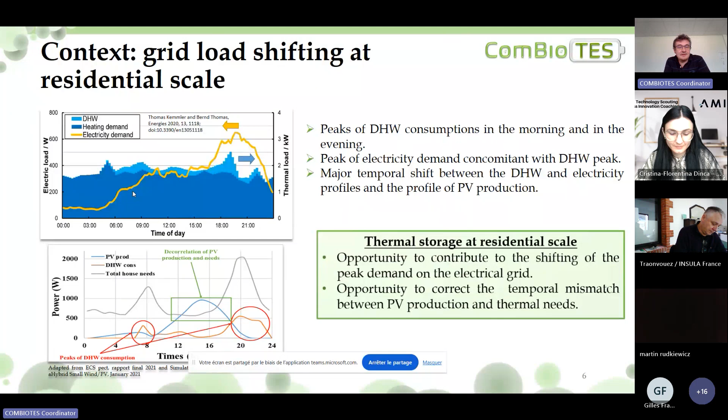at residential scale. So in ComBioTES, what we want to do is to develop thermal energy storage solutions for thermal applications in houses, typically for space heating and/or hot tap water production and/or cooling at residential scale. What you can see here is the real scope of the project. The main scope will be the development, test, characterization and demonstration of two different thermal storages. The first one, called the versatile, mainly for heating and free cooling, and the second one, which is the topic of this workshop, for the production of domestic hot water and space heating.

In parallel, in the project, we have an important task devoted to what is called EMS, Energy Management System. The EMS is supposed to make the link between the grid, the PV on the roof, the cost of the electricity, basically everything, and the thermal storage and the thermal needs. The objective is to operate the thermal storages efficiently.

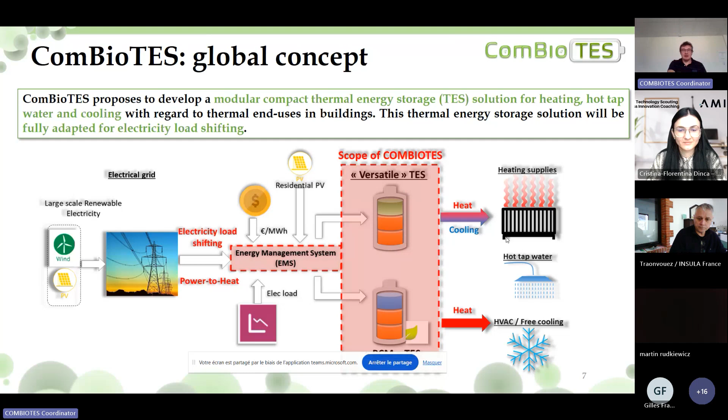The behavior will be a little bit different in summer. With low price of electricity, we will make what we call a cold charge of the versatile TES that will be used later for cooling, and we will charge the PCM TES for domestic water. And when the electricity prices are high, or when we have a demand, we will discharge the versatile for space cooling, and we will discharge the PCM storage for hot water. This is the principle.

Some objectives of the project will be quite short on this slide. We have a lot of objectives, and the main objective basically is to design, characterize, test both thermal storages, the versatile one and the PCM storage. We have to work on a new bio-based PCM for heating and tap water. We have to develop the EMS, the Energy Management System. We will perform some kind of techno-economic analysis and environmental impact also. And something which is a very important part of the project is the demonstration.

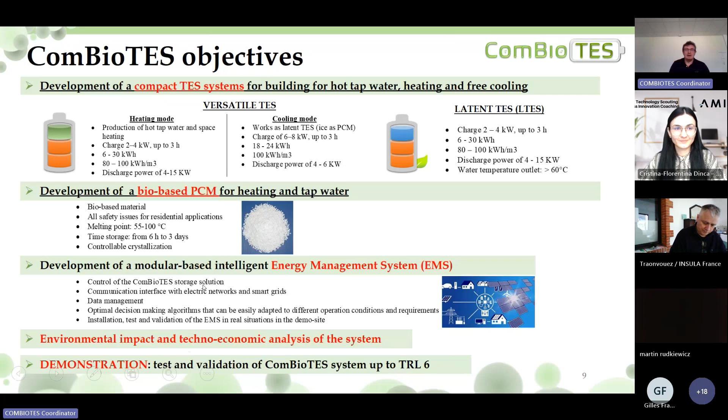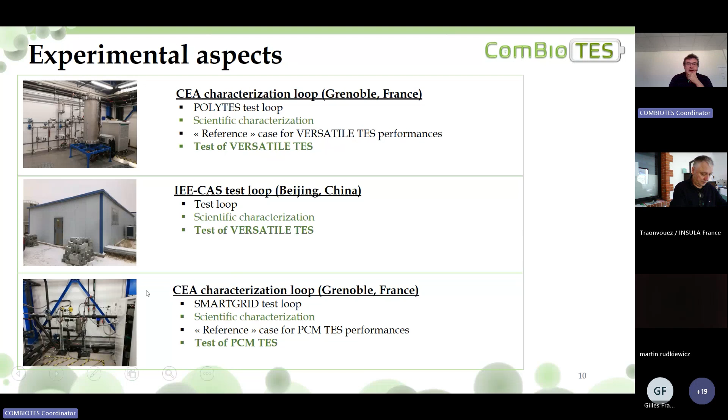The demonstration will be made in a lot of different sites. The first one, the main one, will be the CEA in Grenoble in France, because CEA is responsible for the development of both storages. So we will test the versatile and the PCM storage from a scientific point of view. Then we have a demonstration site in China to test the versatile TES. This is a scientific characterization, academic tests. And then we have three more realistic demo sites.

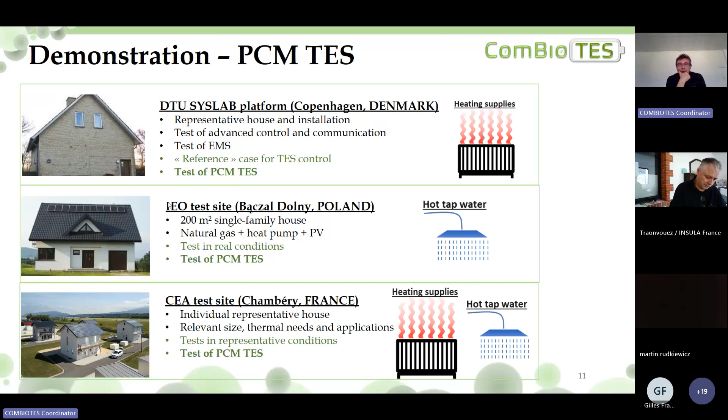The first one is at DTU in Denmark. We will test the PCM storage for space heating, in not a real house, but a close to real house, a representative house with a lot of different installations. At CEA in Chambéry, in France, we have the same kind of installation. We will test the PCM storage for space heating and hot tap water. And we have a site in Poland, which is a real house with real people inside, a four-people family, and we will test the PCM storage in real conditions to produce hot tap water.

Today the workshop will be divided in four different sessions. The first one will be focused on the input: what are the specifications, the requirements, the constraints for the sizing and the definition of the storage. In session 2, we will focus mainly on the protocol, the way the storage has been defined and the way we transform a storage into a complete prototype. In session 3, we will focus on the EMS, the energy management system, the architecture, the philosophy, the different developments, the use cases, and we will close the workshop with session 4 and the demonstration, the demo sites, the way the prototype will be integrated, and the use cases.

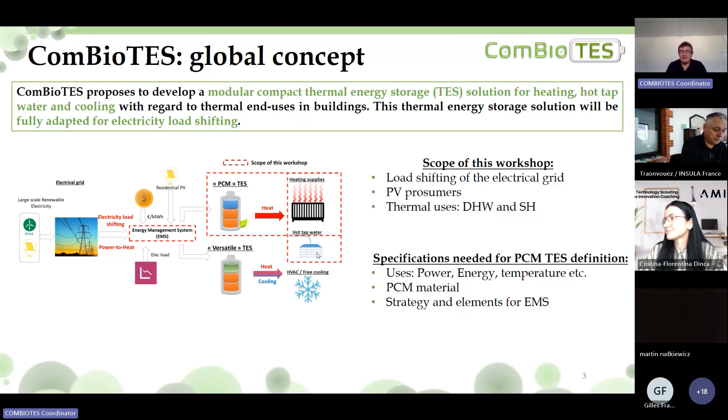So what we will do is to see some specification for the thermal storage according to the electricity market and according to economical aspects. At the same time, on the other end of the spectrum, we will see some specification according to the thermal uses. Thermal uses, so this is the domestic hot water and space heating application.

We will briefly look at some recommendation and specification regarding the PCM. PCM is for phase change material, so that means some specification for the material used in the thermal storage. And we will also look for some specification for the development of the EMS.

The first element is the electricity market, since we try to participate to the grid load shifting. So we look at different regulation in Europe of the electricity market. It's not so easy. It's a little bit blurred. There's a lot of different regulation. And the main conclusion is that this is not easy because there's not a single and easy configuration. And basically, each country is a specific case.

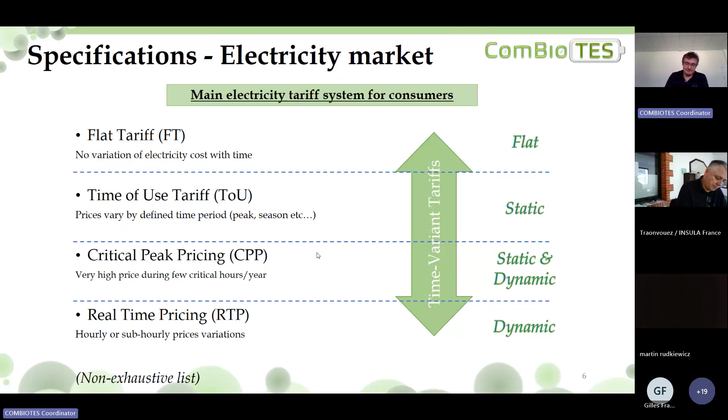The first thing that has been made in the project is to evaluate the relevancy of the power-to-heat for thermal energy storage business, depending on the price tariff. So we choose different countries. We have 1, 2, 3, 4, 5, 6, 7 use cases, mainly in Europe, but including China also. And we try to evaluate the cost efficiency of thermal energy storage.

For flat tariff, the main conclusion is that there's no interest because there's no difference in the prices between night and day, for example. And basically, when the prices of electricity are evolving with time, it is more and more interesting to use thermal storage to perform power-to-heat. And obviously, the most interesting situation will be a real dynamic tariff of electricity.

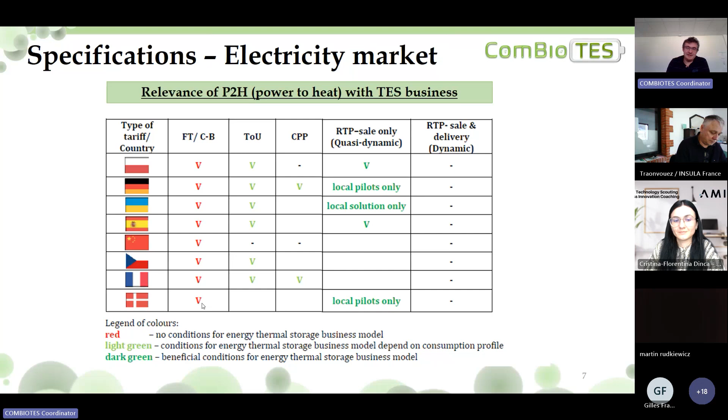So just from the electricity market point of view, what I'm saying is that we need evolving prices of electricity, even if maybe it's not the best solution for the simple consumer. And some of the different cases that we show in the previous slides will be integrated and considered for the EMS and for the evaluation of the relevancy from an economic point of view of the thermal energy storage.

If we look at the other end of the spectrum, so the thermal uses, we look first at the domestic hot water regulation. It's not so easy also because it's different in every country. It's not really regulation. It's more a kind of list of strong recommendations. But it can be more or less summarized as it is.

So you have a minimum temperature in the water tank, because all these regulations are made for the water tank, which is the thermal storage deployed in houses. You have basically a minimum and maximum temperature in the water tank. You have also a minimum and maximum temperature in the draw-off.

Based on this small review, it was possible to define some elements for ComBioTES. And basically, we consider that we want a temperature higher than 60 degrees in ComBioTES, and we will consider that the discharge will be stopped at 40 Celsius degrees.

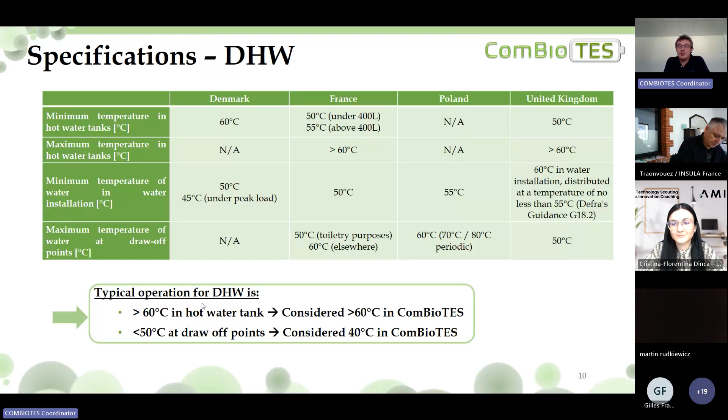Regarding the typical value of consumption, the typical value for the sizing of the storage is that for a house of 4 people, we need something like 8-9 kilowatt hour of thermal storage for the production of domestic hot water.

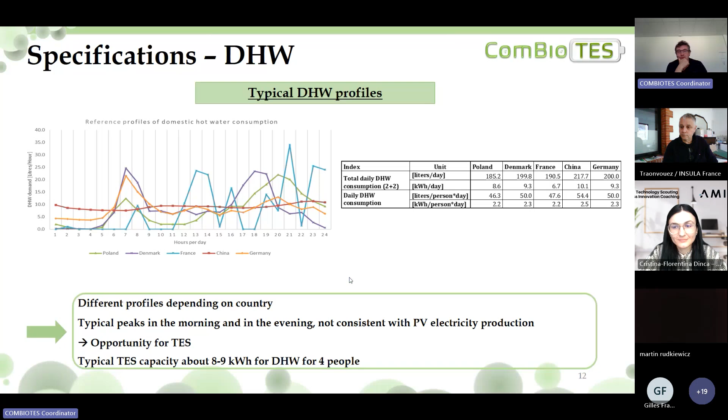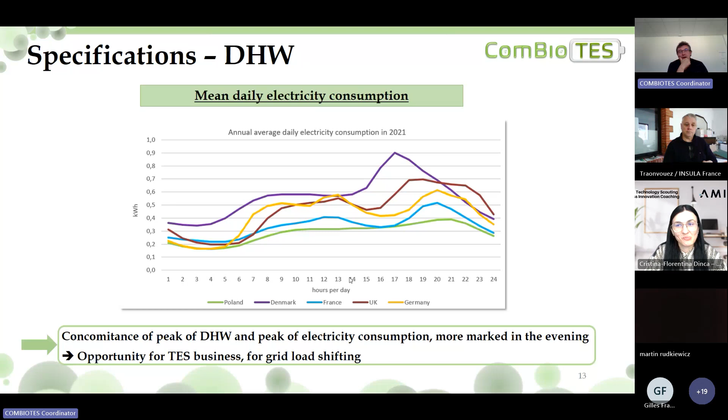Just something to remind is that what you can see here is the typical electricity consumption of the same house in the same country, and you can see that there's a kind of concomitance of the peak of domestic hot water and the peak of electricity consumption. And this is even more true in the evening. So from an economic point of view, there's an opportunity for the business of thermal energy storage for the participation in grid load shifting and to try to make more money by not using electricity for the peak in the evening.

And in this case also, due to the concomitance of the peak of space heating and the peak of electricity consumption, for example in Denmark, we can conclude that there's a kind of opportunity for TES to participate in grid load shifting linked with space heating.

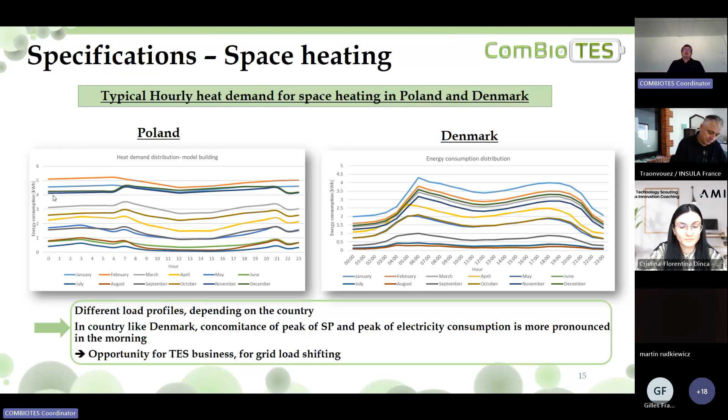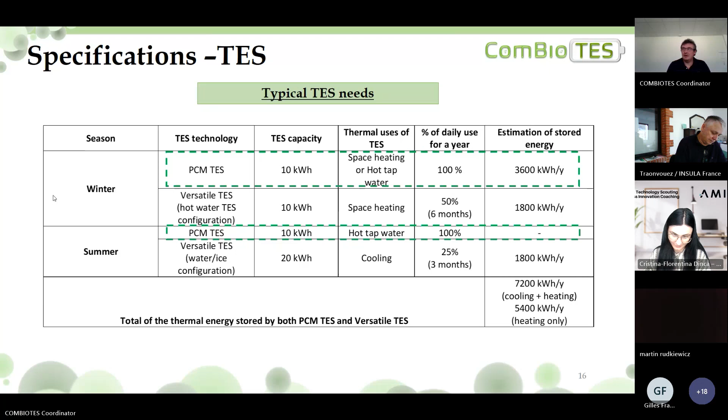If we try to summarize the needs, we can conclude that for the PCM storage, something like 10 kilowatt hour for hot tap water and sometimes also for space heating can be sufficient to fulfill 100% of the daily use of the house. And so, based on these elements, we define the first use cases.

So for domestic hot water, we want PCM with temperature higher than 55, 60 Celsius degrees. We want a storage with a capacity in discharge of about 8-9 kilowatt hour at outlet temperature higher than 40 Celsius degrees. The thermal power in discharge will be a little bit higher than 20 kilowatt. This is taken from ADEME in France, which is the French Institute for Energy Use. And the typical discharge flow rate will be 12 liters per minute, from ADEME also.

For space heating application, due to the large diversity of configurations, we choose to use the typical specification and typical configuration from the DTU partner in Denmark, because it seems to us quite relevant. So the inlet temperature in the space heating system will be 55 Celsius degrees, the return temperature will be 45 Celsius degrees, and the nominal flow rate is 13 liters per minute.

Just keep in mind that a storage sized for domestic application will clearly be too small for complete space heating application, but it is not a problem. It is quite accepted in the project.

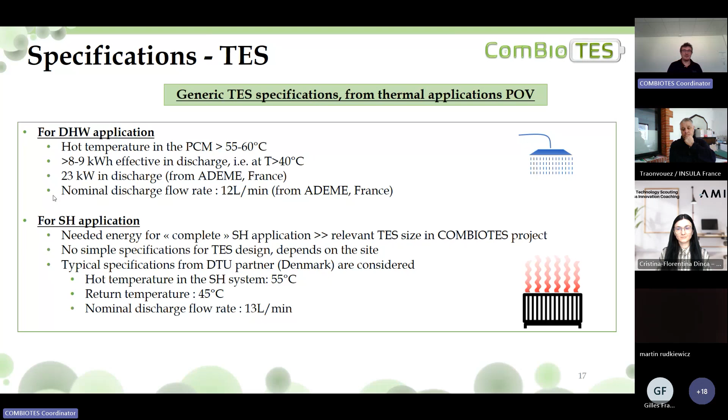Now that we have defined briefly the use cases, we have some recommendation specification for the choice of the PCM. Just from technical point of view, we want a bio-based PCM. We want a melting and solidification temperature quite in line with the use cases. Obviously, we want the highest possible volume enthalpy. Obviously, we want a high thermal stability. We want that the PCM will not have some oxidation, dehydration.

And it is quite preferable that there is no supercooling, because supercooling has to be managed, and in this case, it's not so easy. From economical point of view, it should be as low as possible, even if this is not the first order, because the price of the PCM is not the first element in the final price. And from safety point of view, we are looking for non-flammable, non-explosive, non-toxic PCM, and something that is clearly harmless for human and for environment.

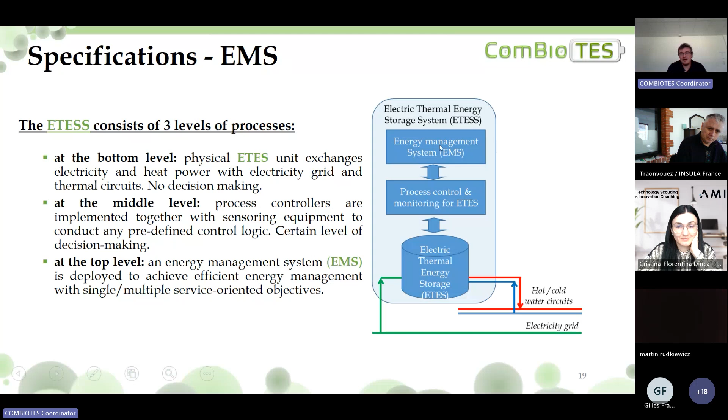And now we can briefly speak about the specification for the EMS. What you can see here is basically the configuration considered. We have here the real thermal energy storage. Then we have a middle level layer, which is the PLC. So this is the process control, the monitoring of the PCM storage. And then at the top, we have the EMS. And so the EMS will exchange element with the PLC, receive the data from the TES, and the EMS should give some order to the PLC based on elements and based on data from the PCM TES.

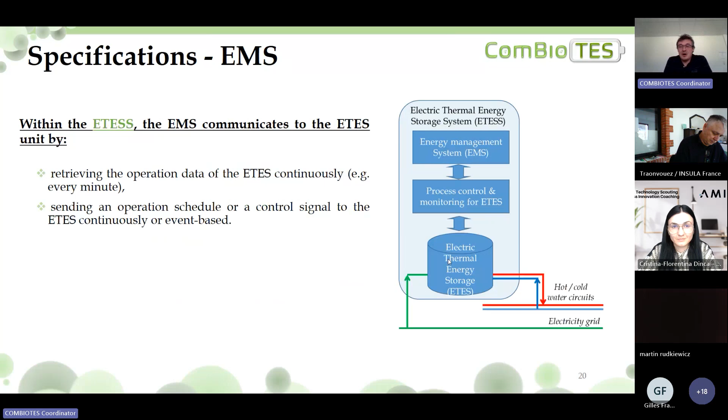And basically, as I said, the EMS takes some data from the thermal storage and is sending element to the thermal storage as a response of this data and as a response of other configuration or other consideration. These considerations are mainly the ones listed here. So obviously we have the end user. That means that the end user is asking for space heating, asking for hot water.

But we have to consider also the grid operator. The grid operator, for example, can say that he would like to see a reduction of the load on the grid. We have the aggregator, if we consider that we are not only considering one single thermal energy storage, but that thermal storage can be controlled in mass to make a mass effect. And we have other considerations, for example, the weather forecast, this kind of element.

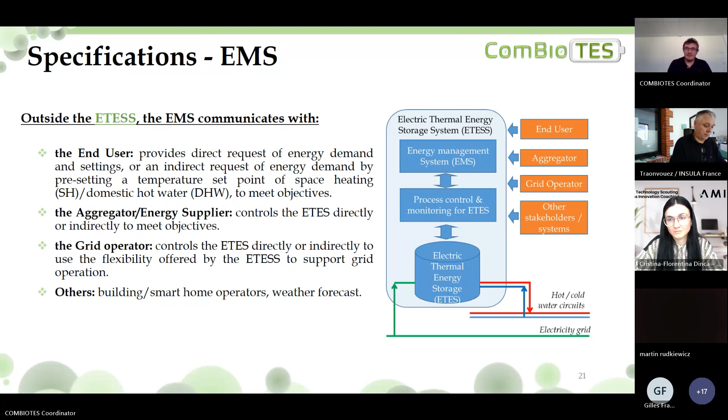And so for the EMS, we have this kind of specification. On the left, you can see the global geometry with the thermal storage, the PLC, with the EMS. We make a calculation between information and requirements coming from, as I said, the user, the grid, the price, the weather. At the same time, the EMS has to consider the feedback from the states of the thermal storage.

And for the deployment of the EMS in the demo site, we have considered different scenarios. The first one is mainly based on the objective of reduction of costs, based on the price difference on electricity between periods of high prices and low prices. It is based on time of use tariff, and we will use some cases based on France, Poland, UK, Spain, and a specific case for Denmark, because Denmark is already using quasi-dynamic tariff.

We have a second scenario based on the peak load reduction, which is mainly based on the France use case, because in France we have a specific time of use tariff, and we have a mostly nuclear production of electricity. So we are in a very specific configuration for the production of electricity. And we have the final scenario, in which we will try to optimize the use of local renewable energy, which is mainly based on the demo site in Poland, because in the TES demo site we have also PV on the roof. And so we will consider two different specific cases, which are the net metering for the prosumer and the net billing.

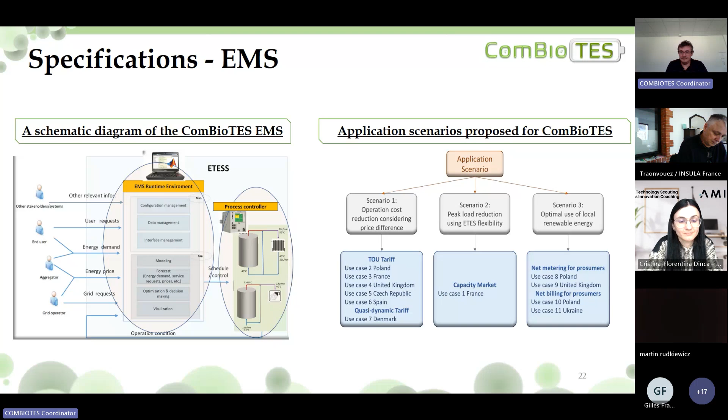So if I try to summarize the specification, we want temperature higher than 55 Celsius degrees inside the PCM. We want something like 8 to 9 kilowatt hour in discharge, with threshold temperature of 40 Celsius degrees and thermal power higher than 20 kilowatts in discharge. We have specification also on the thermal flow rates. The specific requirement has been completed by some element for space heating. Mainly, we have changed the temperature, and the threshold of 40 Celsius degrees is now a threshold of 45.

We have some simple and basic recommendation for the PCM. We have some recommendation based on the electricity market. So we want to perform electrical heating to participate to the electric grid load shifting. We want to be able to integrate local PV. And for the EMS, we have to consider a 3-level EMS from low to very high level of decision. And we have defined 3 typical use cases that will be tested and characterized on the different demo sites.

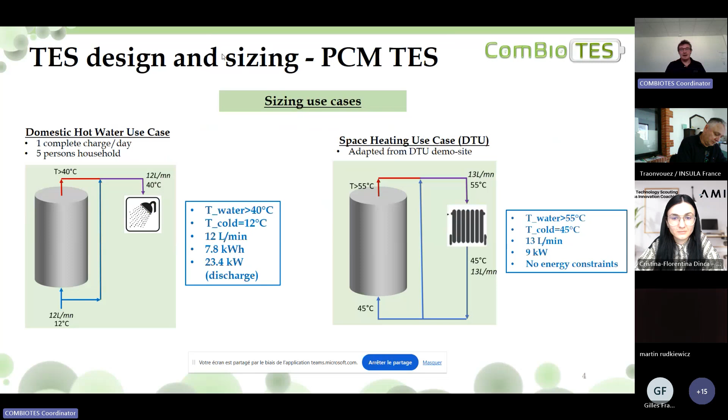Just to remind you once again the use cases. The first step is to choose a geometry. At this step, frankly speaking, we consider a classical geometry. This is a tube and shell configuration. So we have a bundle of tubes. We are considering finned tubes from the petrochemical industry, so these tubes are easily available and can be easily found in different sizes and configurations.

In the tubes, we are including inserts to reduce the section, and so to increase the velocity and the heat transfer coefficient on the water side. This tube bundle is placed inside a shell. The shell is filled with PCM, and on the top and on the bottom we have the distribution, the plenum inlet and outlet, in which we will find the fluid distribution system.

In the shell we also consider a gas volume, so a part of the shell is not filled with PCM, just to be sure that the thermal dilatation between liquid and solid will be managed without any pressure issue. So to define this storage, we need to fix the geometry of the tank, the geometry of the tube bundle, the number, the diameter, the fin characteristics. We have to check that everything is okay from a hydraulic point of view, and we have to fix also the PCM.

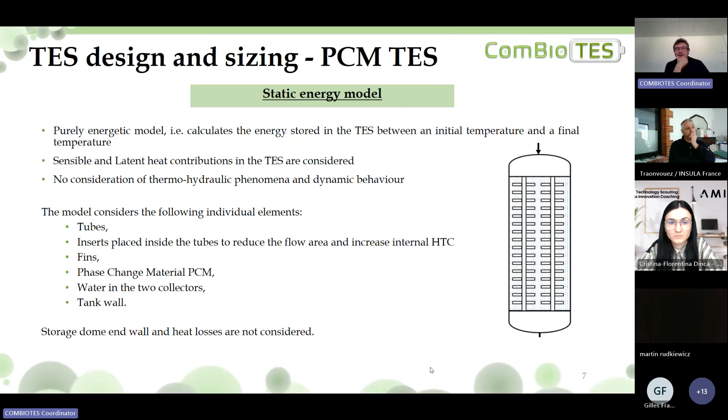We are considering the tubes, the inserts, the fins, the PCM, the water in the collector, the inertia of the tank wall, but we do not consider the storage in the dome end. We do not consider the thermal losses, and there is absolutely no consideration of the physics inside the tubes, meaning the thermohydraulic behavior.

So we start with a first kind of pairs. We have, for example, some pairs based on a tube diameter and insert diameter. So we have small tubes from diameter 25 to big tubes of diameter 50. We have some diameters for the insert, and we are considering also the number of tubes.

In this case, we are considering a bundle based on a triangular array. So that means that we are not putting the number of tubes we want; we are following a rule. So we are considering basically configurations based on 7 tubes, 19 tubes, and 37 tubes. And so we are evaluating in this configuration the first geometry of the tank, diameter and height, to obtain the 8 kilowatt hour between 40 Celsius degrees and 70 Celsius degrees.

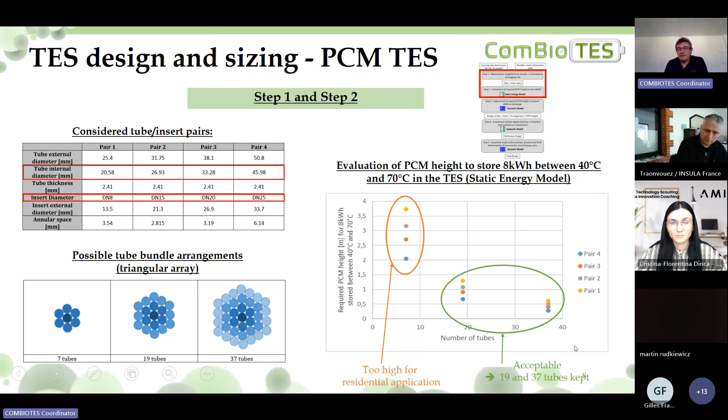So the first element is that, for example, all these configurations have been excluded, because what you can see here is the storage height as a function of the number of tubes for the different pairs. And in this configuration, the minimum height of the storage is 2 meters, from 2 to 4 meters, which is clearly not consistent with the requirements of thermal storage inside a house. So that means at the end of the first stage, we are considering only these configurations, which are highlighted in green.

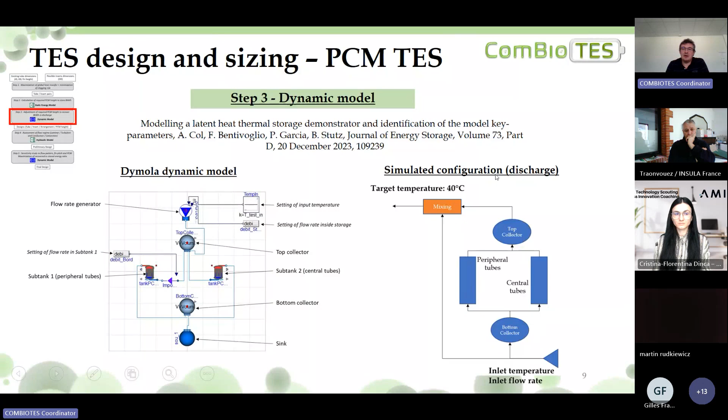So we are simulating top and bottom collectors, and we are dividing the tube bundle into 2 separate parts, the one in the center and the one close to the wall. We consider this configuration because the tubes near the wall will see different elements, mainly considering the thermal losses, and so it was more realistic to do it like that. And this model has been integrated in quite simple elements: we have the thermal storage, we are putting inlet temperature, mass flow rate, and we want at the outlet a minimum temperature of 40 Celsius degrees.

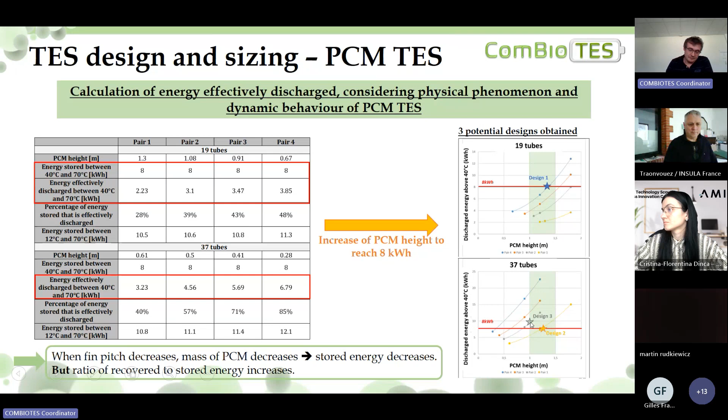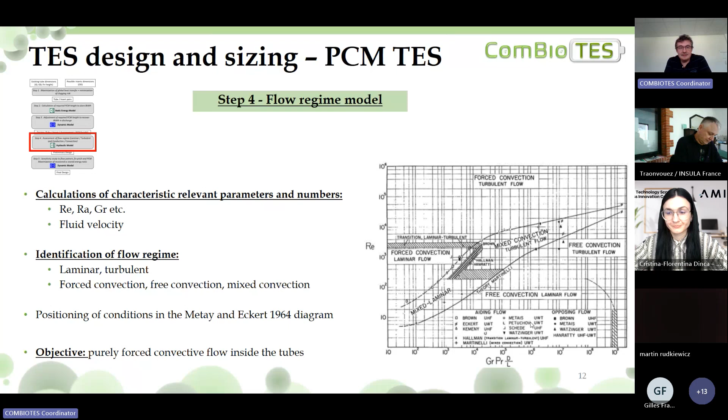Now we have to consider something which has not been integrated in the dynamic model. In the dynamic model, we make a huge assumption. We make the assumption that inside the tubes, the water is in forced convection. But this is something that has not been assessed at the moment. So we make this assessment.

We consider the flow map of Eckert and Metais, which is a classical flow map of single phase flow in forced, mixed, and free convection, including laminar, turbulent, and transition regime. And we calculate the relevant numbers, the Reynolds numbers, the Grashof numbers, the Prandtl numbers.

We put these numbers on the map, and what we can see is that the first design, the design 1, can be excluded because the design 1 is at the same time in a mixed convection regime and in transition between laminar and turbulent. So that means that we are basically in a not so stable flow. So it has been excluded. We have just 2 designs remaining.

And for the 2 designs, we were looking at the annular space inside the tube, so the space between the tubes and the inserts. And we can see that this annular space is ranging from 2.8 to 3.5 millimeters. And based on the CEA expertise on previous designs, we are considering the design 2 with the maximum annular space to try to avoid clogging.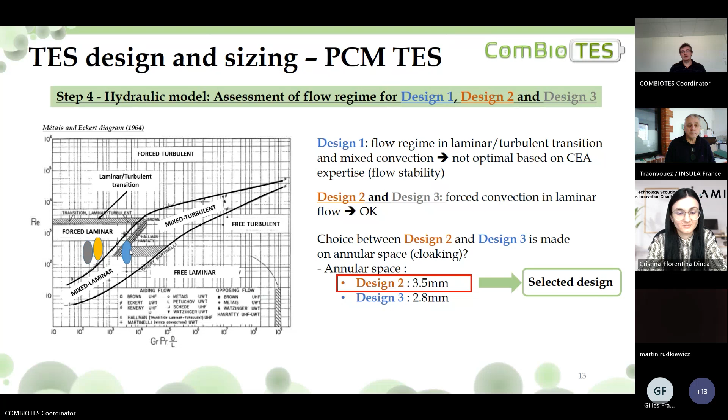So we have a reference design, which is the design 2. This reference design is based on 37 tubes, 25 millimeters of outside diameter. We are using octadecanol with a melting temperature of 55 Celsius degrees.

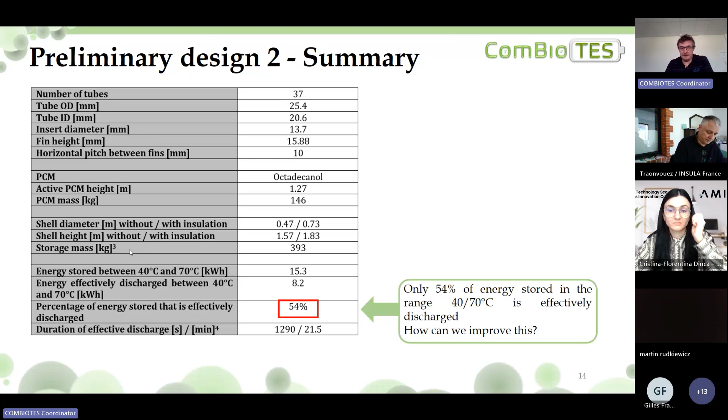And in this case, we discharge effectively 8.2 kilowatt hours between 40 and 70 Celsius degrees with a discharge efficiency of 54%. So basically that means that a little bit less than half of the usable energy is not effectively used. So the next steps are to see how to improve this percentage.

This is the sensitivity analysis. The first element we are looking at is the fin pitch. Just to show you, we have the tubes, we have in green the fins, and the fin pitch is the distance between the fins. Obviously, if you increase the fin pitch, you will increase the mass of PCM, so you will increase

the energy that can be stored, but you will increase mainly the mass of PCM in this zone, which is called the free PCM. So this is a zone that is outside the fins. So that means that it is a zone of low thermal conductivity. So this is energy that may be difficult to be effectively discharged. So we make the analysis for a pitch between 20 millimeters and 1 millimeter.

And what you can see is that if you decrease the pitch, you will significantly decrease the mass of PCM from 200 to 100. You will significantly decrease the energy effectively discharged from 9 to 7 kilowatt hours, but you will significantly increase the discharge efficiency from 45 to 66. So that means there's a kind of balance to obtain between the energy that can be stored and the energy that is effectively discharged.

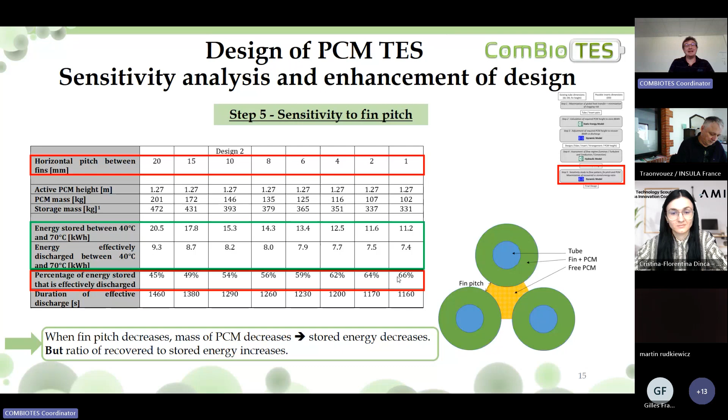We test also the PCM and the charge temperature. On the two first columns, we consider the same PCM, octadecanol, and we increase the charge temperature from 70 to 75. The consequence is that we increase the discharge efficiency from 54 to 55. So the impact is quite small.

On the contrary, we change the PCM. And for example, in this case, we use two different PCMs with a melting temperature of 70 Celsius degrees. In this case, we increase drastically the discharge efficiency, and we reach something like 70%.

And basically, the interpretation is relatively easy: the threshold temperature is always kept at 40 Celsius degrees. If we increase the melting temperature of the PCM, we increase the part of the latent heat that will be used. And so that means that we will increase, as a consequence, the discharge efficiency.

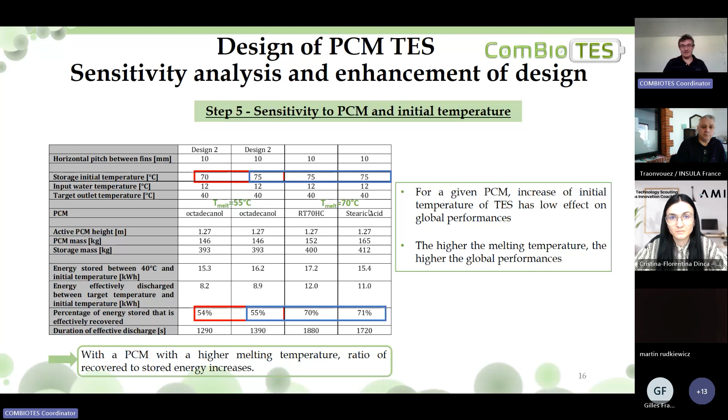And the final element that has been studied is the flow pattern. The classical way to design and to operate a PCM storage is to consider a single pass fluid flow. So that means that all the tubes see the same temperature level at the same time at the inlet. And in this study, we introduce what we call the three-pass fluid flow.

So that means that at first, the fluid is entering the tubes on the peripheral layer. Then it will leave this region and enter the second layer, this one. And finally, it will enter the tube in the center. We can consider also a three-pass flow in the inverse direction. So we start with the inner tube, then the middle layer, and we finish with the peripheral configuration.

And just as a theoretical approach, we considered what we call the 37-pass. So that means that all the tubes are connected in series. And we can consider that in this case we have more or less only a single very long tube.

We consider the exact same configuration of the storage in terms of temperature and diameter, and the consequence is that with a single pass, we have a discharge efficiency of about 54%. This discharge efficiency is increased to 70 and even 75% in the three-pass flow, and in the 37-pass flow, we have an efficiency close to 100%.

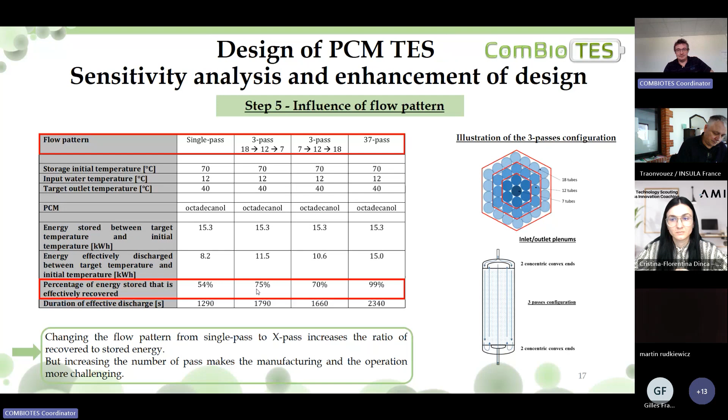The last thing that has been studied is the internal heating. Internal heating in PCM storage is not so easy. And so in this project, we consider that we will perform internal heating by adding some heaters inside some tubes. So we perform some simulations with different numbers of tubes, different configurations and positions of heaters, and different power.

Just to make it short, we have selected the configuration in red based on a total of 3 kilowatts of heating, which is quite consistent with the typical power in a water tank for the same application. We consider 7 tubes to obtain something which is more or less homogeneous, or not so heterogeneous, on a given plane. And using this configuration, we consider that it is possible to perform a full charge in less than 6 hours. And we consider that it is quite consistent with, for example in France, heating during the night for using domestic water during the day.

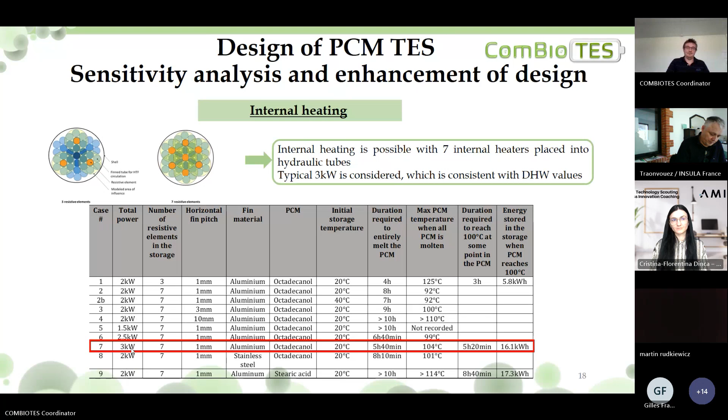And so at the end of this process, we have our design with some backups, because we are not sure that everything will work properly. The design is basically based on what I have presented before. In this design, we have changed the PCM. This is now a paraffin with a melting temperature of 70 Celsius degrees. In this design, we are considering 3-pass flow. We are considering electrical heating with internal heaters. And the expected performance is a discharge efficiency of 81%.

We consider some backups. If, from an engineering point of view, it is too complicated, the internal heater will be removed. In this case, we can see that the discharge efficiency is a little bit higher than 100%. It can seem illogical, but in fact, it can be easily explained by the fact that this discharge efficiency is based on a temperature threshold of 40 Celsius degrees. And so, during the discharge, we will use the PCM at temperatures below 40 Celsius degrees to make the first step of the heating. So that means that part of the energy below 40 degrees is used to maintain temperature higher than 40 degrees.

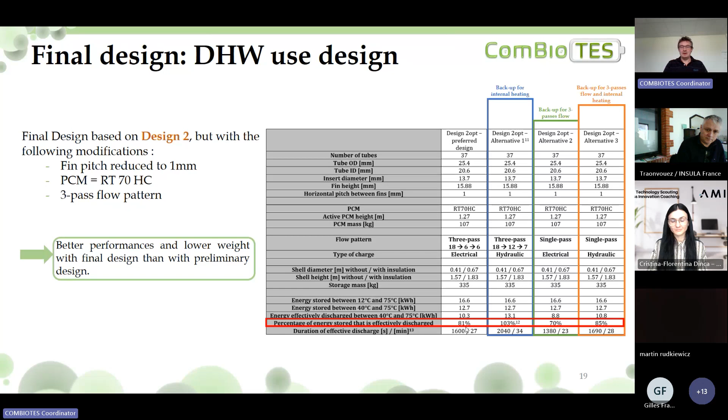These values have also been calculated for the second use case, the space heating. And basically, this is more or less the same, with efficiency ranging from 73 to a little bit higher than 100%.

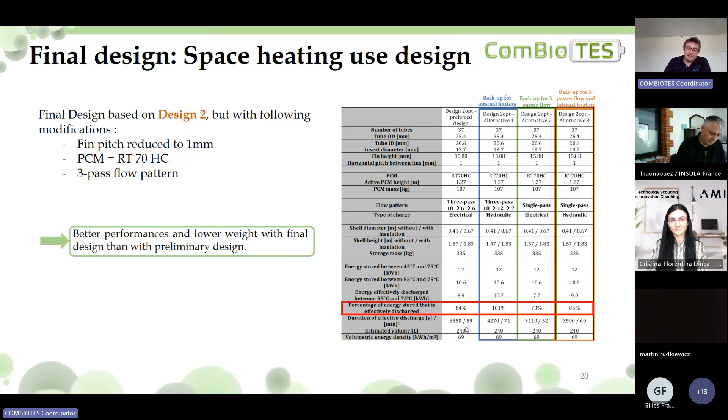So, as a conclusion, at the end of this process design, we have what we can call a kind of paper design. This is a design without any consideration of engineering, of feasibility, of complexity. But it is a design with 2 innovations, the main one being the 3-pass hydraulic pattern.

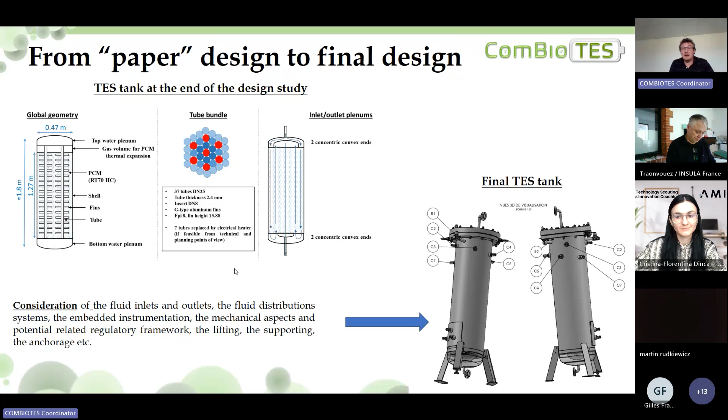In this project, we continue also with a final step, which is the transformation from a TES tank to a prototype. Obviously, if we want to install the TES tank just as a classical water tank, the tank is enough. But this is a research project, so we defined a prototype in which a lot of components and sensors have been added, and in which all the backups have been integrated. So we need to define a lot of additional circuits and elements.

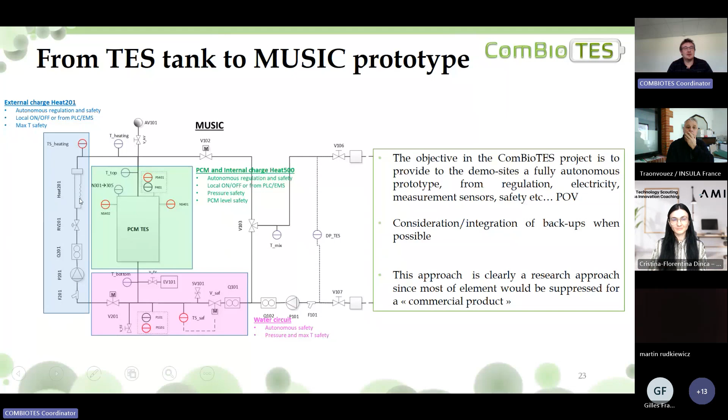Obviously, from a single tank, we have a very big, heavy, and non-cost-effective prototype. But as said before, we are in a research project, and if we want to properly characterize the behavior of this prototype, we have to know the value of the flow rate, the pressure, the temperature, where it's working well, where it's not working well.

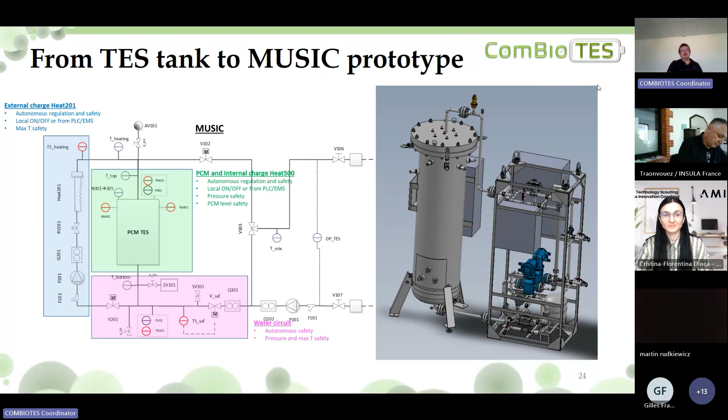So this prototype is currently under manufacturing. The tank is made for one prototype, and the skid will be finished in the next few weeks. So the first prototype to be filled with PCM and tested may be finished in 2-3 weeks. At the end of this process, we consider that we have a fully operational prototype that can be tested on the demo site.

Any comments? Any question? Yes. Yeah, there is a question. Go ahead. Gilles. Yes, thank you for the presentation.

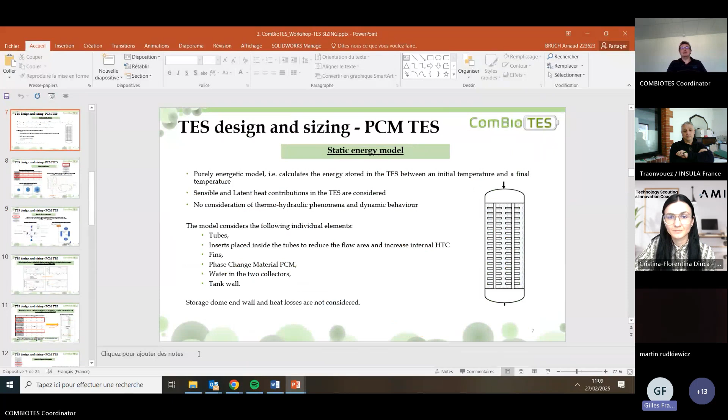Just one question about the PCM. At the beginning, the PCM is supposed to be bio-based. And at the end, RT is a paraffin? Yes. So you think it's not possible to define a tank with PCM which is very efficient and with bio-based material? But this is a bio-based paraffin. Ah, it's bio-based. Okay.

And just to give more information, I did not mention it at the beginning because it was too long, but RT70HC is our backup for the PCM. At the beginning, we wanted to try a new PCM, and we tried isosorbide, which is a sugar alcohol, with a melting temperature in range with the application. We tried it because it was also manufactured by one of the partners in the project, but we have a small issue, which is the supercooling.

In parallel with the design process, we put isosorbide in one of the CEA's already existing PCM storage prototypes, and we performed some characterization. The conclusion is that we have some supercooling at storage scale. So we chose not to use this PCM, to use a backup, and not to characterize a brand new PCM.

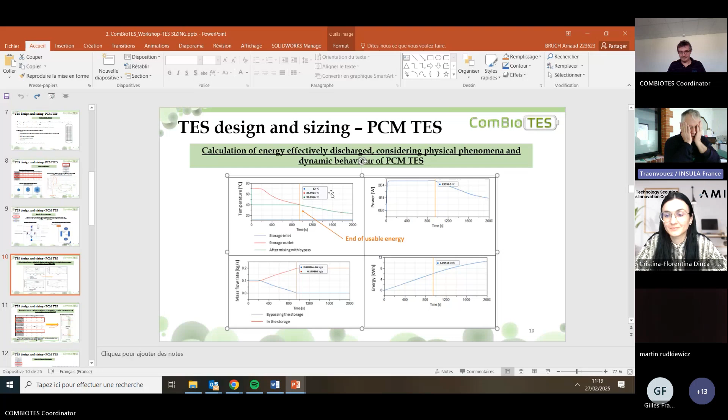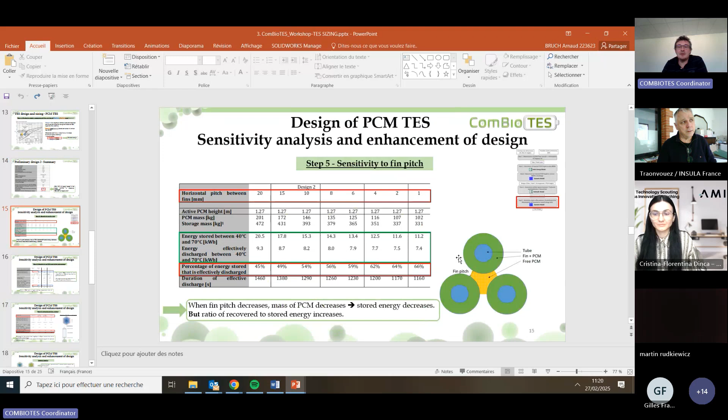Yes. This is something that will be studied, but what we think is that in this configuration we have PCM with low thermal conductivity. So we consider that between the different passes we may have some thermal exchange, but it will be more or less limited due to the low conductivity of the PCM. And so during the sizing, the assumption made was that each pass can be more or less considered as independent. And during the scientific characterization, we will see whether this assumption was good or not.

Okay. Because my concern was that you would have melting starting at the bottom, and then a risk of mechanical failure, for example. Yes, exactly. This is something that has been considered during the design. We think that it should be okay, but it is based mainly on our expertise and feeling; we are not sure. Okay. Well, it depends if there's a film of melted PCM all the way up. And we are expecting that the liquid will always find a way to the gas volume on the top of the shell. Okay, fine. Thank you.

Hi, I'm Xin, and now I will introduce the energy management system, EMS, part of this project. What is an EMS? An energy management system is a framework for energy consumers, including industrial, commercial, and public sector organizations, to manage their energy use. The primary goal of an EMS is to improve energy efficiency and reduce energy consumption by providing real-time insights into energy performance and energy optimization, which leads to cost savings and environmental benefits. Many organizations adopt EMS as part of their broader sustainability and corporate social responsibility initiatives.

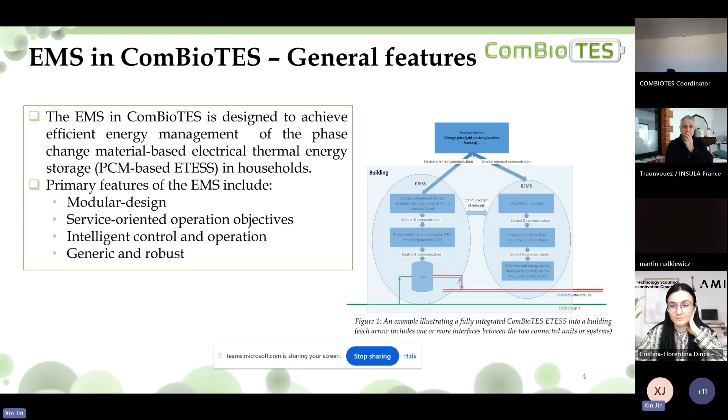The ComBioTES EMS has a relatively generic configuration, wherein communications take place between the EMS and other parts residing either inside or outside of the ETESS. Figure 2 presents a relatively generic description of the EMS setup. And within the ETESS,

the EMS communicates to the ETES unit by retrieving the operation data of the ETES continuously, and also sending an operation schedule or a control signal to the ETES continuously or event-based. This requires the EMS to have a reliable communication with the process control solution and condition monitoring function implemented by the technology provider. Outside of the ETESS, the EMS needs to provide a communication interface with the following systems or stakeholders,

like the end user, who may provide a direct request of energy demand and settings, like turn on or turn off, or an indirect request of energy demand by pre-setting a temperature set point of space heating or domestic hot water in order to meet objectives. And the energy supplier or the aggregator, who may want to control the ETES directly, such as by sending one or a series of energy power requests, or indirectly, such as by sending energy prices or energy consumption limits in order to meet objectives.

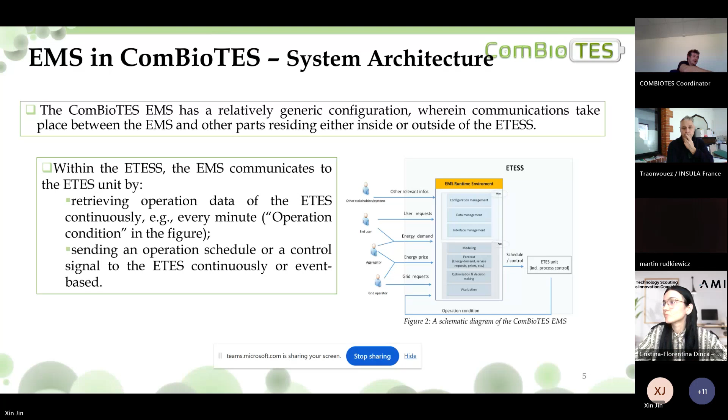The ComBioTES EMS will be deployed and tested in 3 locations: Denmark for the space heating case, France for the domestic hot water case, and Poland in a real house case. In these three countries, the market framework and operation modes are different. So we designed 11 application cases, which are classified into 3 scenarios. They are used to specify the function needs and benchmark the performance of the ComBioTES EMS based on

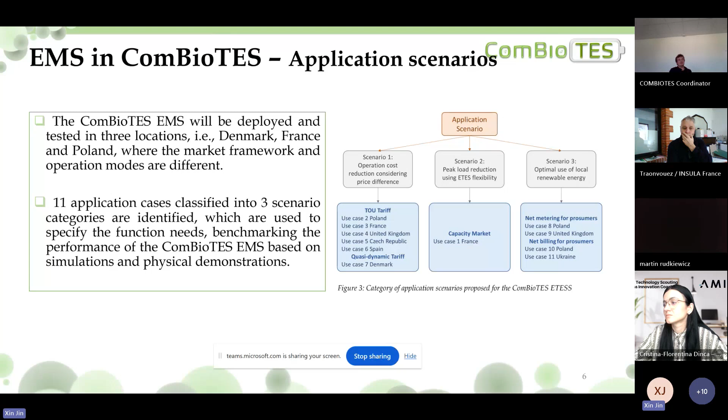simulations and physical demonstrations. For the first scenario, the goal is to achieve operation cost reduction considering price difference, like the TOU tariff and the dynamic tariff. For the second scenario, the goal is to achieve peak load reduction using ETES flexibility. The third one is the optimal use of local renewable energy. We take the first scenario, operation cost reduction, as an example.

The decision making in the EMS is achieved by economic model predictive control, which employs an economic-related objective function for real-time control under complex and uncertain conditions. This implies a sequence of adjustments for manipulated variables computed and applied to keep the reference trajectory over a future time horizon. The cost function is defined to measure the economic performance or sum of squared control errors predicted over some time horizon, and the minimum cost is guaranteed.

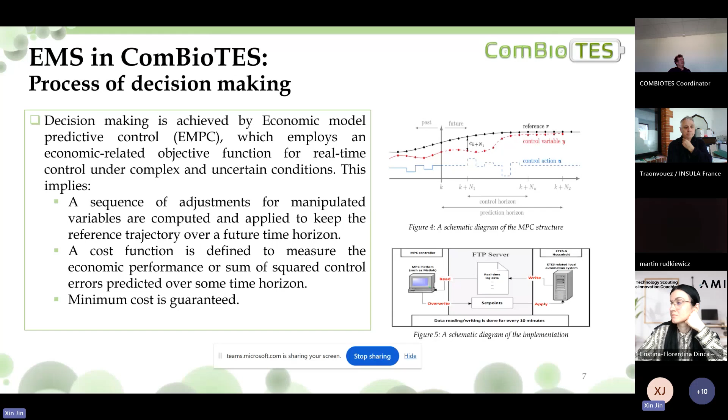The EMS prototype built in this project integrates several key components to ensure optimal performance and energy efficiency. We can see from figure 6 there are three key components. The first one is the PCM-based thermal storage system, the MUSIC. The MUSIC system forms the foundation of the thermal storage, utilizing the internal or external heating elements or both to charge the system with heat, which is then supplied to the household. This system includes the storage unit and the essential interfaces such as electricity, heat, and communication.

Part 2 is the household energy network, which delivers electricity to the MUSIC system and receives heat from it to fulfill the heating needs of the home, such as space heating and domestic hot water. Part 3 is the EMS part, and the integrated EMS solution consists of a PLC, the router and the EMS platform. The PLC is programmed to automate rule-based processes such as real-time control, data logging, and safety and protection based on local data from the MUSIC system.

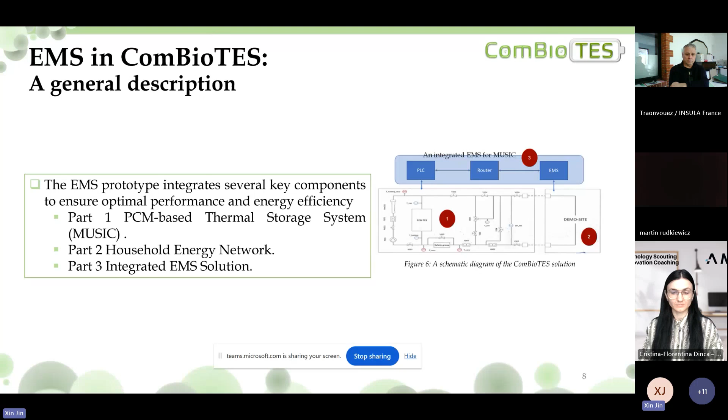Additionally, the EMS can exchange information with external global data sources, further enhancing its ability to respond to various dynamic conditions. And given the different configurations of the MUSIC, like with the internal or external heating elements, or whether it's for space heating or domestic hot water, and also different operational conditions like the dynamic hourly pricing or the time-of-use tariffs, each of the different EMS prototypes has slight differences tailored to the specific needs of the demonstration sites.

The data exchange and integration are supported through the EDDK platform hosted by DTU. EDDK provides open and real-time access to various data sources, such as electricity prices, weather forecasts, and weather conditions. In this mock-up setup, the platform offers APIs that allow seamless data exchange between the EMS and relevant data channels. A router acts as a communication gateway between the EMS PC and the EDDK platform, which provides smooth data transfer.

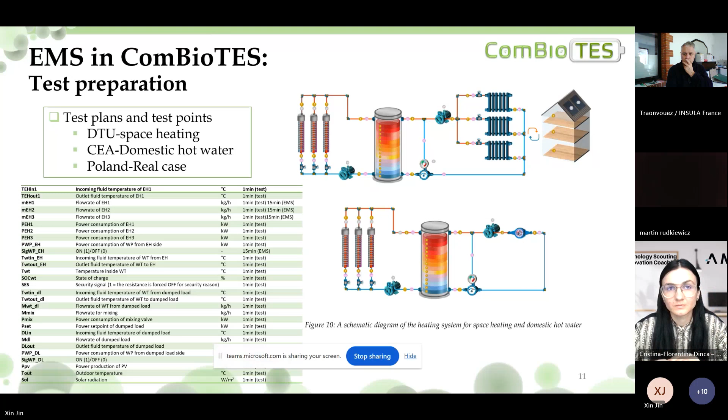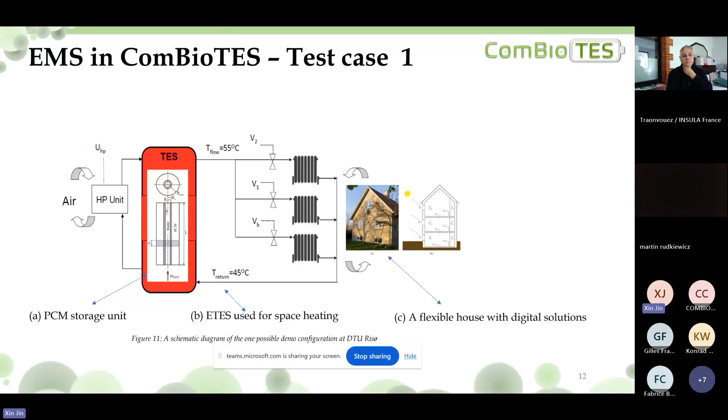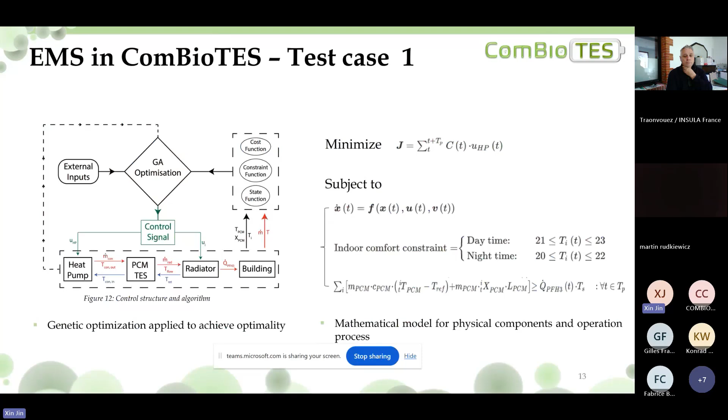We also did some test cases. This is a system using the FlexHouse 3 as the end user for space heating, and the PCM storage unit to store the heat for space heating. We use genetic optimization to achieve the minimal operation cost under the constraint of indoor comfort, and we can achieve the minimum cost and guarantee the comfort level over a simulated period of 10 days.

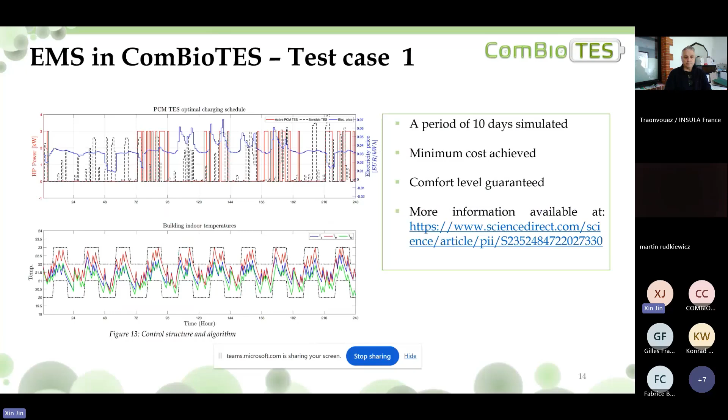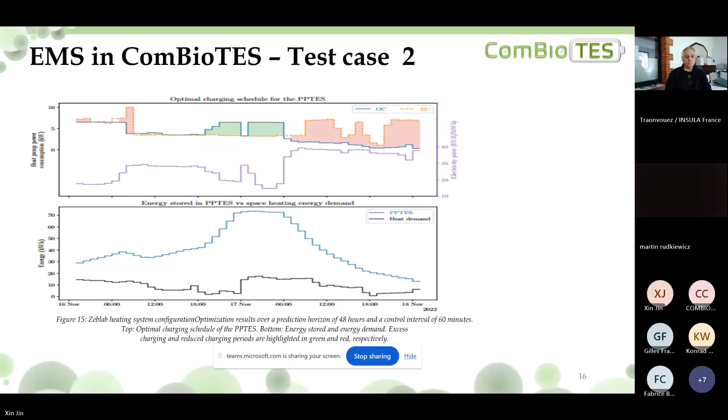And finally, we conclude that an intelligent EMS algorithm based on MPC has been developed to optimize energy management for the ComBioTES across a range of operating conditions and locations. The algorithm features a generative presentation of modules for adaptability and optimality. Simulation-based results show it can be flexibly deployed in the EMS backend across various scenarios, significantly improving energy performance in cost reduction, flexibility management, and user comfort.

In addition to the basic modules, the EMS can also include other auxiliary modules such as data management, robustness module, and visualization modules to improve its practicality, which will be selectively developed during the demonstration.

And finally, the variance in locally available information across application sites means the current EMS requires manual configuration. Automating the creation of matching files based on a harmonized data streaming process, for example, linking to building automation protocols, will be a key stepping stone to enhance the EMS efficiency. And that's all. Thank you.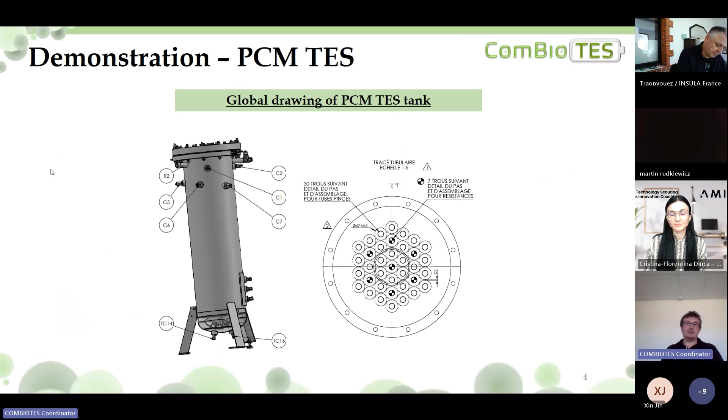Thank you. The last session is devoted to the demonstration, so it will be less technical to finish this workshop. I will speak about the demonstration, and only the demonstration of the MUSIC prototype, so the PCM storage. In a large definition of demonstration, the main objectives are the manufacturing of the prototype, its scientific characterization, and the demonstration. And we have two types of demonstration: a test in a controlled environment and a test in a real environment. Just a reminder of the storage and a reminder of the complete prototype.

Then we have a first interface and first work between CEA and another partner, Delaunay. Delaunay is the boiler maker. So with Delaunay we make the transformation of the paper design to the final design and to the manufacturing.

At the same time, all the instrumentation put inside the storage is installed by CEA. So that means we have a lot of interfaces. Then the prototype is filled by CEA at CEA, and then the prototype is shipped to the demo site. On the demo site, the demo site owner will be responsible for the electricity, for its own demo site in terms of engineering, components, piping, and we have a last interface, which is the EMS, the PLC EMS, just presented before. And this part is made by DTU.

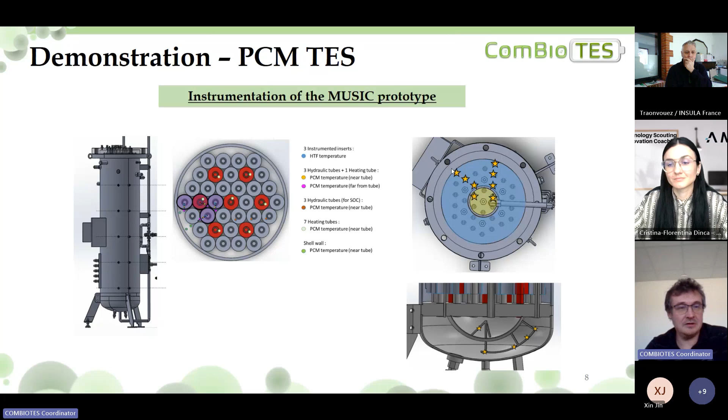We will have a lot of information at the end of the project to characterize the behavior and the innovation put inside the PCM storage. Now, looking at the demonstration sites. As I said, the first one is not considered by the European Commission as a real demo site. This is a site for characterization, in France, in Grenoble. This is a fully academic test loop, which is called Smart Grid. And it will be the reference case for the performances, since we will use the prototype with the most thermocouples inside.

Then we will send a prototype to DTU. I will present the demo site in detail later. This is a representative house installation. Such installation has already been used in a lot of previous projects to test different storages and different ways to operate it. So this is an installation clearly made for such demonstration. We will test only space heating. And since DTU is responsible for the development of the EMS, this demonstration will also be the reference case for the EMS PLC and the TES control.

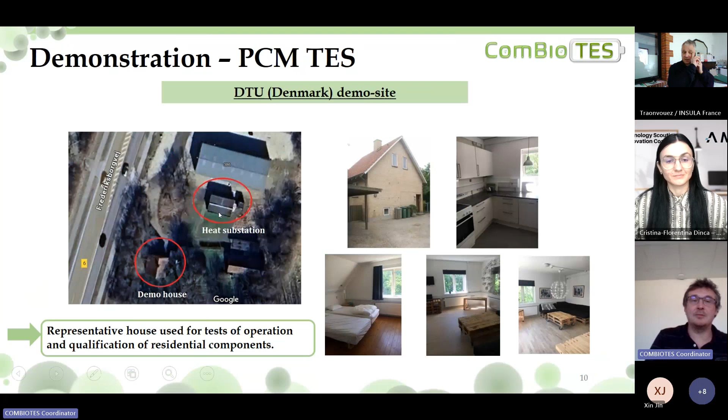So it is in fact a real house, well instrumented. What you can see also on this picture is the location of the demo house, and this is the location of the heat substation. Basically, all the control of what will happen inside the demo house will be made in this substation, and the prototype will be also included in this substation and controlled from this substation.

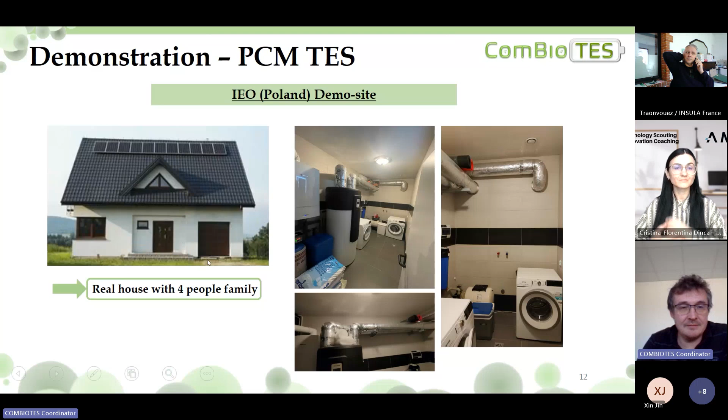Looking at the Polish demo site, this is a real house. First, you can see on this picture where the prototype was supposed to be installed, but since a few weeks, we changed the location because it was quite complicated to install the prototype in such a small space. So the prototype will be installed, in fact, here in the garage.

The prototype will be also installed in a more complicated configuration because this house is already equipped with a gas boiler here. This house is already equipped with a thermodynamic heater for the production of hot water, so that means it is a water tank coupled with a heat pump. They have already PV on the roof, and PV is used for the heat pump. And PV is also sent to the network. PV is used inside the house, but the gas boiler is also used in the water tank as backup, in case of really cold conditions in winter.

And so the integration is not easy. The integration chosen is based on the fact that we will install the PCM prototype. We will keep the existing water tank as a backup in parallel, just to be sure that if we have any issue with the new PCM storage, people living in the house have a backup to have hot water. So that means that the operation of the storage tank should also include a backup operation mode, just in case it's not working properly.

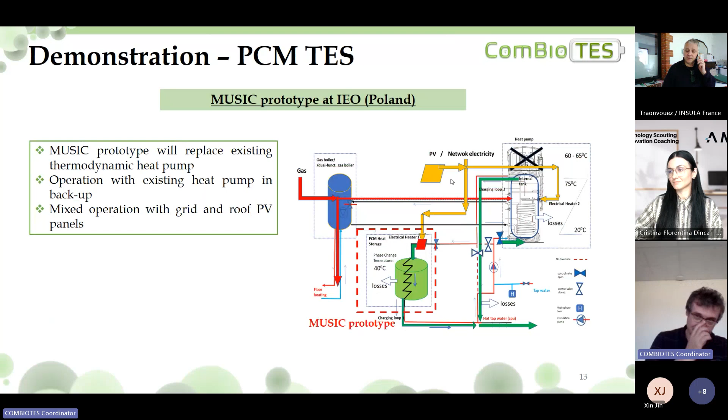Okay, and the final site is the one from CEA in France. In principle, it is close to the one of DTU, but less developed and smaller, because we have only a small network of 4 different houses. So it's quite smaller than the one developed and studied at DTU. But for the one of DTU, everything can be made inside.

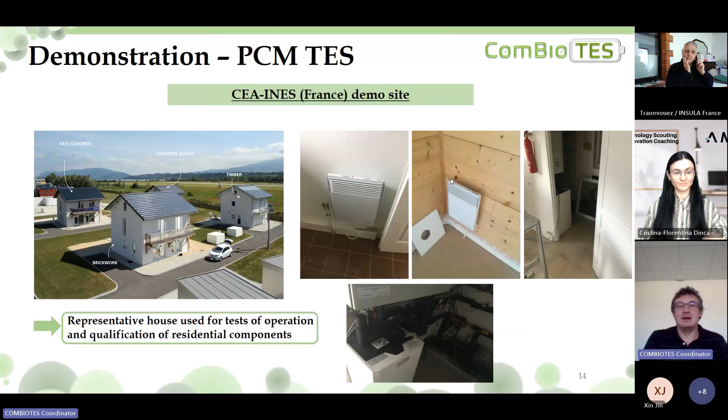In parallel, what is also important is to make a link between this demonstration and what has been defined in the beginning of the project and presented in session 1, so I mean the use cases, the application scenarios. And the application scenarios are based on electrical use case, on thermal end use, and some functionality provided by the system. I reminded here the different scenarios.

The first one is based on the reduction of the costs based on differences in the price of electricity. The second scenario is focused on the reduction of grid load using the storage flexibility. And the third one is focused on the optimization of the use of local renewable energy, in this case PV.